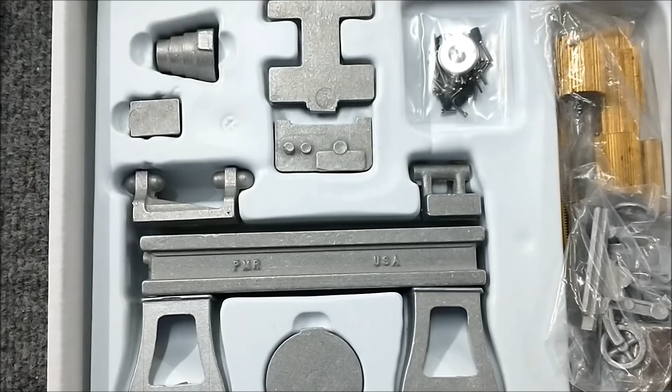PM Research Lathe Kit, Day 1. There's an awful lot of pieces here. As a matter of fact, there's 133 parts that need to be fabricated, and the blueprints are relatively clear.

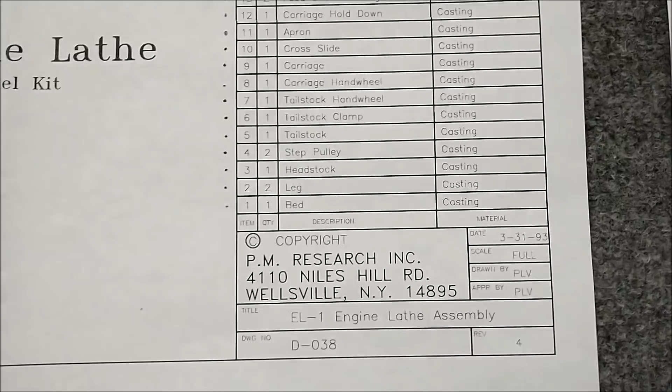The one thing that's not on these prints, and I was quite surprised to see that, is the item number. It tells you what the item numbers are here on the print and how many of each to make, what material it's made out of, or whether it's supplied as a casting. But when you get to the drawings, there's no item number on any of the parts, which I think is unfortunate. So the first thing you're going to have to do is tag them up. Find the part, put the number on the drawing so you know what to make it from.

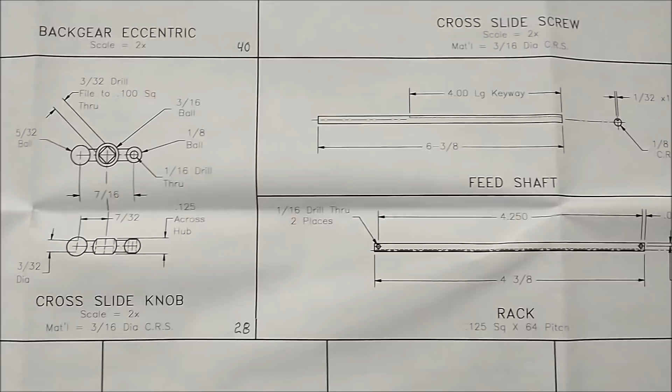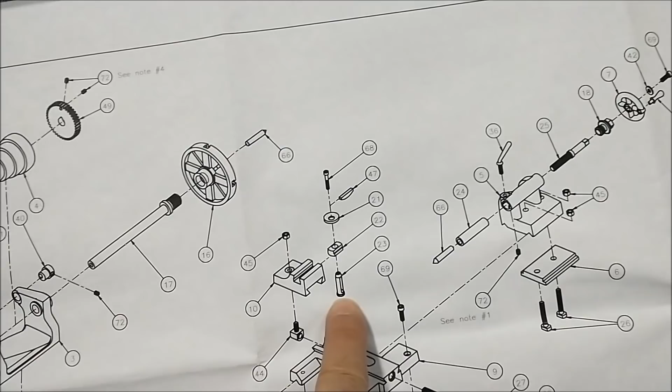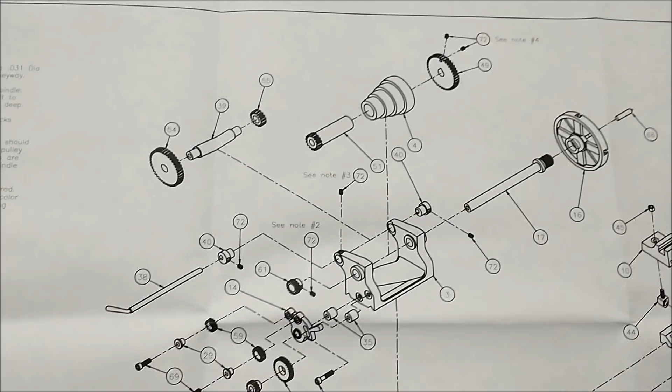There's a million different places that we could start on this model, but I think I'm going to start with something just to have a little bit of fun, and I'm going to make this little tool post assembly today. It is going to be extremely small. Well, since this lathe is so big, right? This has approximately a 3/4 of an inch swing, 19 millimeter swing. And if I am correct, then that would mean the faceplate is 1.5 inches in diameter. 1 3/8 in diameter, so it's actually under 19 millimeters. And that is to the ways, that's not to the cross slide or the carriage.

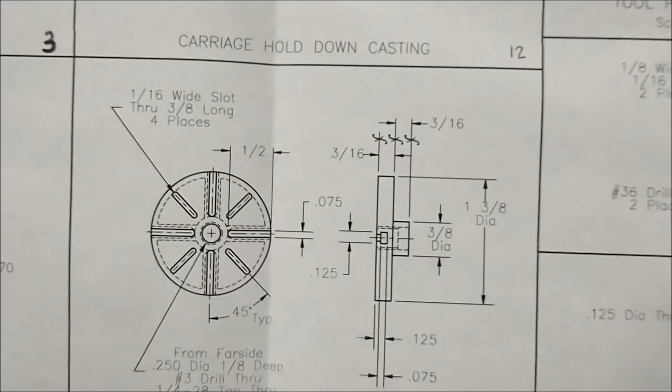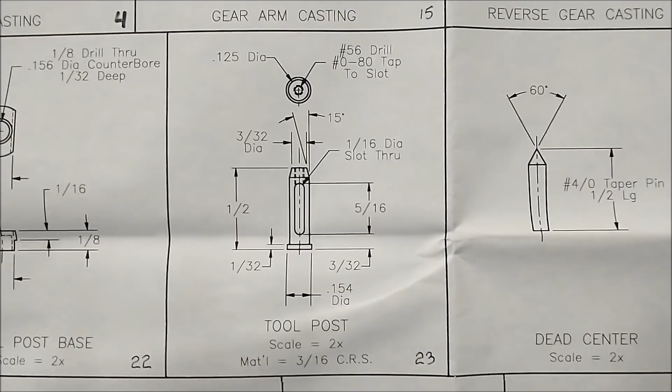These are the parts I'm going to be focused on today. Tool post, the base, the wedge, and the washer. Make a nice little assembly. You're going to see a lot of the techniques that I will use on this are very similar to, if not identical to, the techniques I demonstrated on the steam engine. So that means we're going to leave this connected to the bar, to the raw material, so you have a place to hold it for the slotting. This is going to be very delicate. You could squeeze it end to end, of course, to do that slot, but I think it's just going to be easier to leave it on the raw material that it's connected to initially.

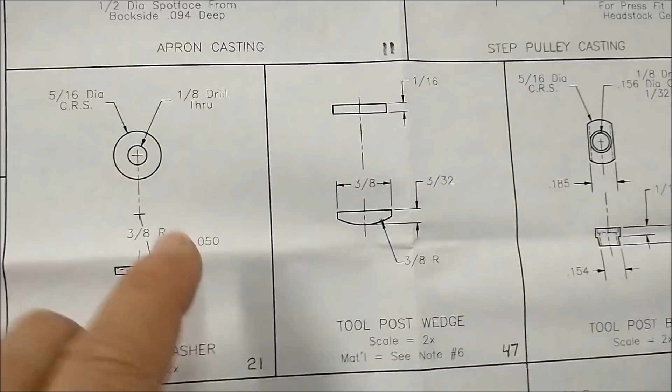This is done out of a washer. So you just take a little washer and you just section a piece off, which is pretty clever. And then make sure the radius in your tool post washer fits the outside radius of the wedge. You want a nice little rocking action when it goes in there. That's it. Let's take a closer look at the assembly print. And this is actually just an exploded view. They do not provide assembly sequence on this. There are some notes, assembly notes, that tell you what gets pressed into what, what's a slip fit.

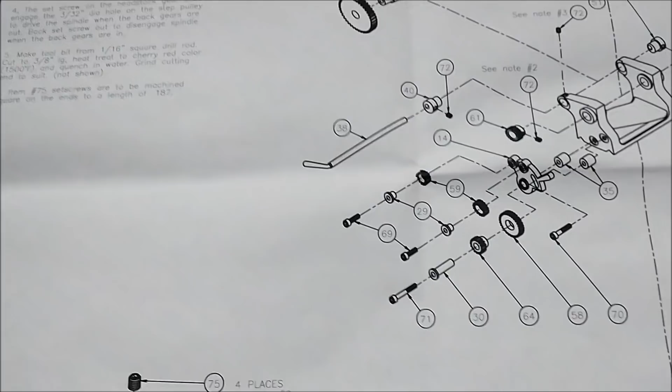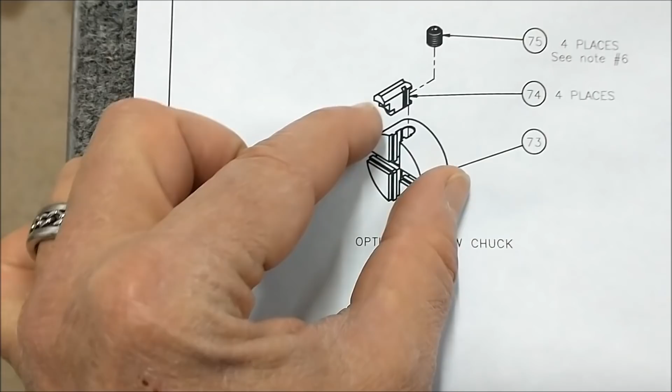And there's the infamous 4-jaw chuck. I'm looking forward to making that thing. That's so tiny. That's about actual size. That's how big it's going to be. Little thing. 25.4 millimeters across.

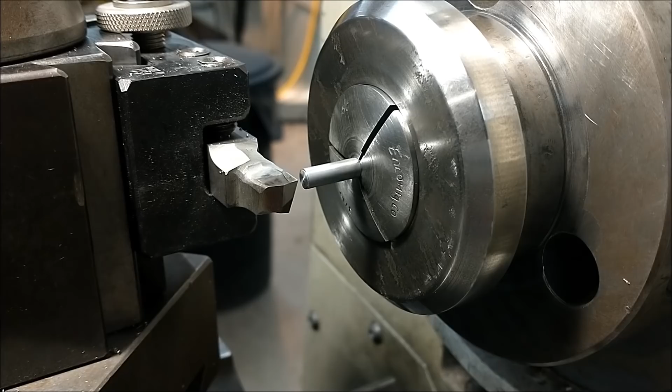All right, let's get over to the lathe, put some material in there, make some parts. First couple operations here are very straightforward. We're going to do the two diameters that are called out on the print, a 185 and a 154. Straightforward turning. Let's do it.

You have a couple of options for the 15-degree lead. You can do it with a form tool, or you can set your compound to 15 and cut it. If it's more convenient, use a boring bar and run the machine in reverse. I'm going to use a form tool. The only danger of a form tool is there's more surface contact and you risk the small diameter climbing up and over the tool.

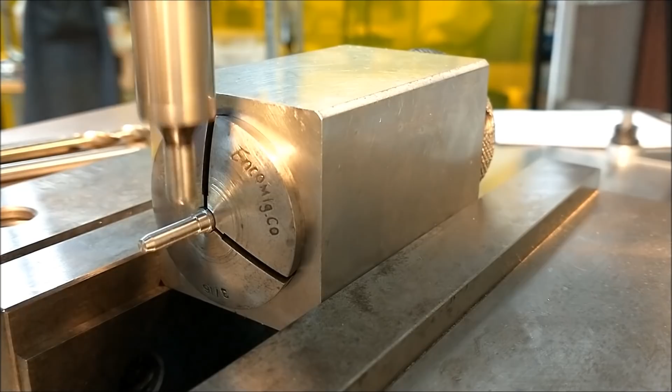I'm going to drill a series of 5 holes in this small part, and then I'm going to pick away at it with a 1/16 4-flute end mill. You can expect some flex to this part, so if you can support it, do. You don't have to, but not a bad recommendation. Spot face features are very small, so is the drill that's about to come. 0.055 in diameter, and we're going through with it.

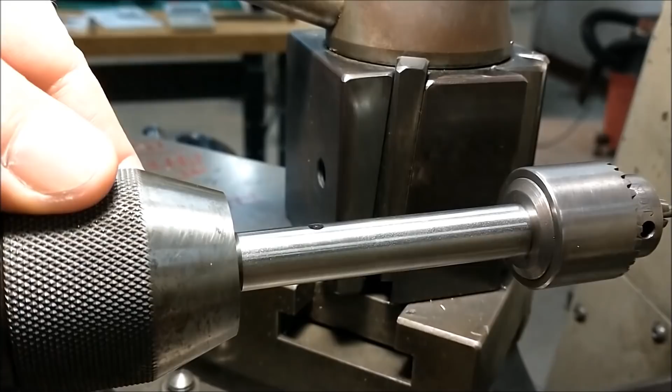All the drilling for the next operation is going to be done with my micro chuck adapter. If you haven't watched the video on how this is done, this is a standard Jacobs chuck, 3/8 capacity. This is a piece of 1/2-inch drill rod that's been turned down to 3/8 and reamed. Another cross hole, and then my micro chuck on the end simply floats in and out.

I will push this in by hand. I will not use the crank. I will get the tailstock close to start the operation, and all the drilling, all the center drilling you're going to see is going to be by finger pressure, just like that. Gives you a great feel. If you don't have one, make one.

This setup works very well when there's resistance on the drill, but be careful if you're breaking through to a slot or a cross hole. It will have a tendency to take off on you, so anticipate that.

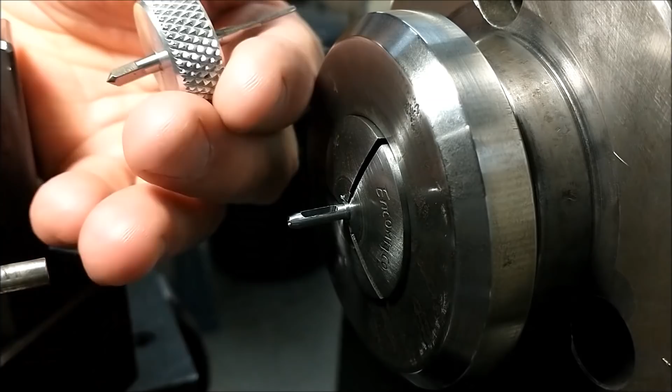Spring-loaded knurled tap guide. If you have one of these, make sure you put a light spring in it for the smaller taps and softer materials. You don't want to drive an 0-80 tap in with the same pressure you're going to use for a 1/2-13 in stainless. Not going to end well, guys. Make sure you know how much stroke you got on it. Preload it. Take your time.

Boy, I would normally be coming over the top with my hand, but I think you guys have seen enough pictures of the back of my hand for a while, huh?

These little wheels work really well. You can actually feel the tap flexing as you drive it in. Treat it like anything else. Back it off and clean it. There we go. Beauty.

This is not the kind of operation you want to do with a T-handle. It's just not suggested. Make sure you use one of these tap guides, or even a broken end mill or broken tap that has a small countersink in it. Use that as a guide. Clear the smudge off of it before we get it out. As you're backing it out, listen for it to click, or wait for it to click. You'll feel it.

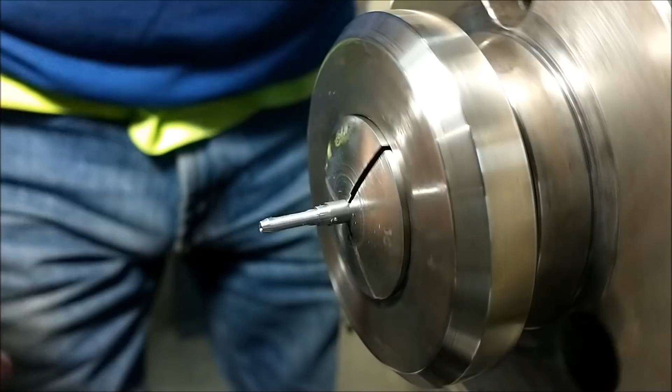Try not to overpower the part with a huge parting tool. Small part, small tool. Part is .500 long, 12.7 millimeters. I don't have the razor blade right with me, so I'm just going to use my little scale here. Part it off longer than I need to. I'm going to flip it around and face it.

Don't be fooled, just because it's small doesn't mean it can't get hot. Watch your fingers. Well, watch your fingers anyway. You might want to just put a cup or a rag or something under the part and not get your fingers that close to anything that's spinning. Especially if it has a slot in it, it's like a blender, so be careful.

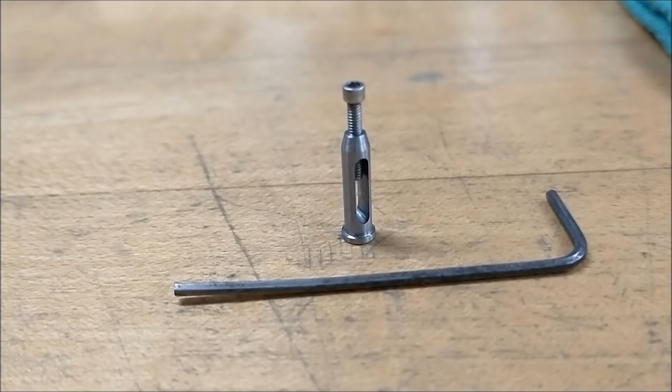Final product is 12.7 millimeters long. It's about 3 millimeters in diameter. For all of my Imperial friends, 1/2 inch long, .125 diameter, .154 head. It's a 1/32 shoulder on that, so it's about 0.85 millimeters thick on the end. 0-80 screw, that's .060 diameter. That is an .060 diameter screw, 1/16 of an inch, 1.5 millimeters also. And I think just by the size of my fingerprint, you can tell how small this thing really is.

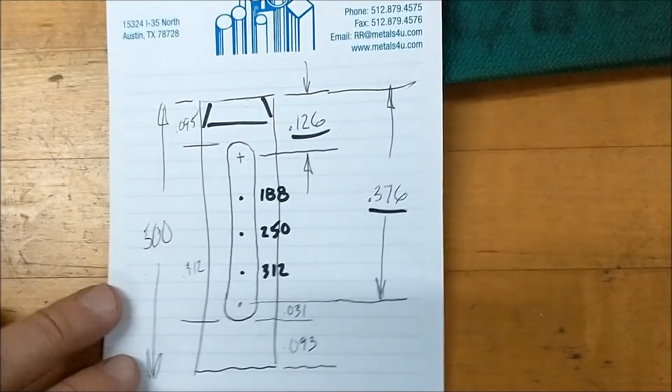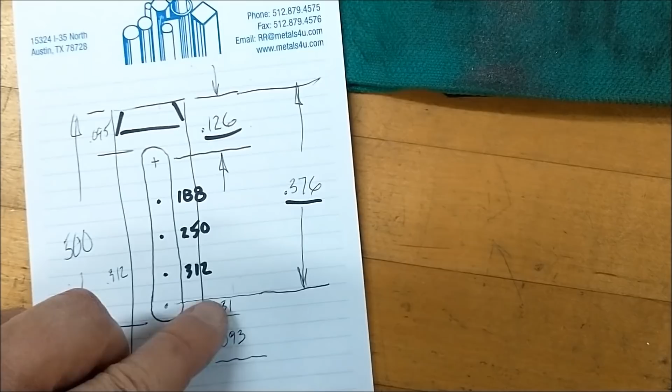Got to start somewhere. Start with the small stuff to give you confidence, because it can only get bigger from here. I promised I would show the numbers that I just used on the print. 5/16 on the print. That's the overall length of the slot. And that is the overall length. That is not center to center. That's the overall. So make sure that you subtract or add the radius of the cutter accordingly, like I did here. First hole was at .126, 1/8,

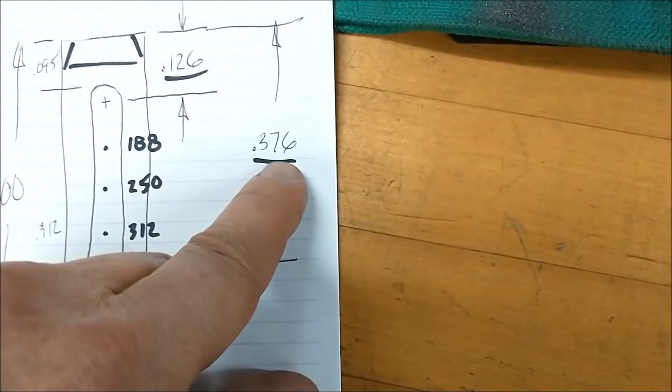3/16, quarter, 5/16, and 3/8. Easy. It ain't pretty, but it worked.

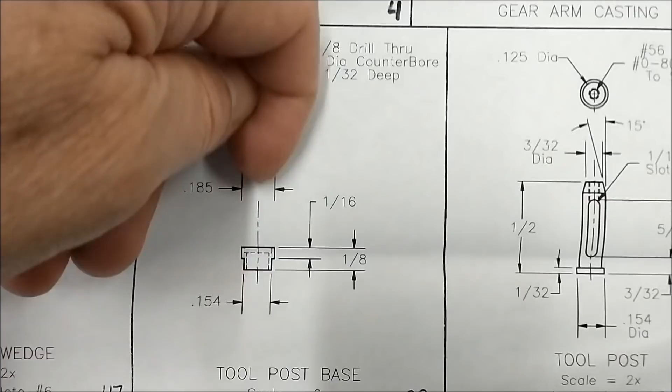The tool post base is going to start from 5/16 diameter cold roll, and I am going to do this backwards. So it's going to start from a round piece, just like it's shown, but I'm going to be able to drill and counterbore from one side, so it's going to be hanging out of the machine this way. I'll take it over to the mill. I will mill the face off, or actually just make contact with it. Do it in a spin indexer so I can rotate and get the .185 width.

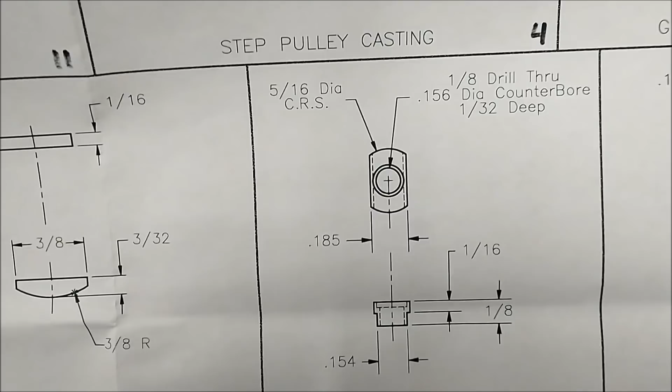And I will step the end mill up and over and do the back side and bring it back to the lathe and part it off. This is going to be a whole lot smaller than it looks when it's done, and I would like it to be done when it comes out of the machine. Let's do it.

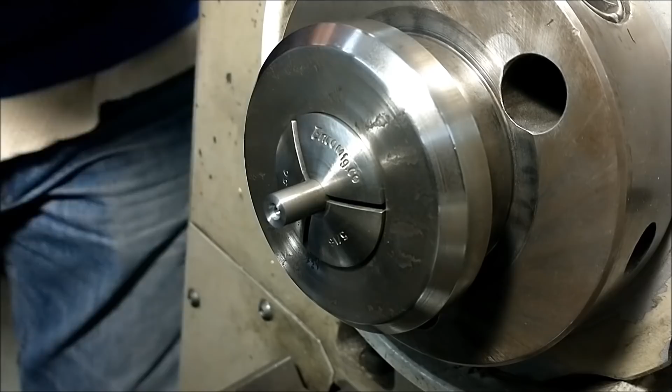Okay, whenever you counterbore a piece after you've completed the through bore, double check the through bore to make sure you didn't close it up from the pressure of the cut. This was minimal, but the potential still exists. Let's take it over to the mill, put the flats on, put the inner flats on, bring it back and part it off.

Okay, we're going to take a small dust cut, a witness pass across the front of this. Then we have everything we need. We don't need an edge finder or anything else. This is a spin indexer. I'm going to do all the cuts by rotating the part and not anything else. I could do it side to side, but stepping in like you'll see is probably the better choice. First thing I'm going to do is just bump this face with this cutter to establish a zero. Let's do it.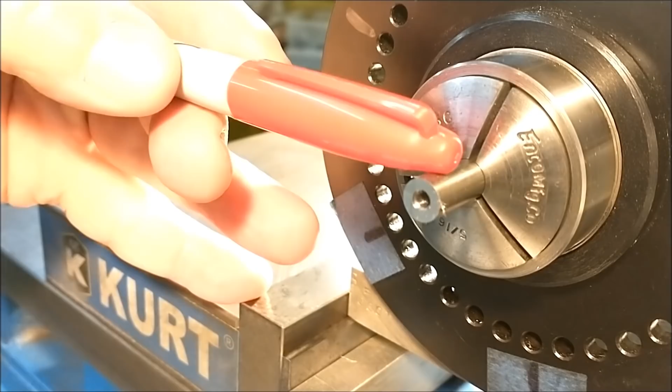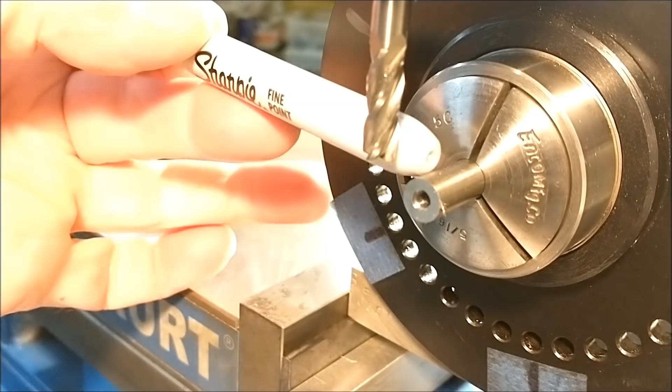The goal here is to end up with 1/32 shoulders on either side of this part. So by doing what I just did, let me get the cutter back into frame here. I know that the inside of the cutter is now true to the face of the part. So if I zero my digital or my dial, when I move in the diameter of the cutter, I know that from that point on, any shift that I make will give me the edge that I'm looking for.

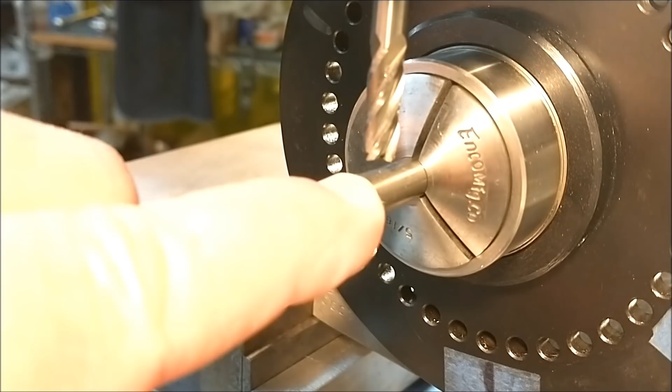To clearly illustrate that, I know this is a .248 cutter. I'm going to pull the part towards me, .248. I'm going to zero the digital at this point. Now if I want to put an undercut on here that leaves me with an .031 shoulder, an .031 shift, and when I plunge this cutter down into this part, the edge that it leaves right there is going to be .031 thick.

Let's do it and test that theory. Pull back on this just a hair. All right, here we go. I'm going to do the outside first though. Outside first, the .185 across the flats.

With the outer flats established, I can move the cutter on the y-axis however thick I want my little T-nut edge to be right there. And that is 32 thousandths. Shift it in, check it out. Excuse me, it is 62 thousandths, not 32, 62.

And you can see how the process works. Once you know the diameter of the cutter, it's easy to shift in the body diameter and then just a little bit more to give you whatever shoulder you're looking for, pretty much with no headache whatsoever. Going to deburr this part, put it back in the lathe, and part it off to the final length of 1/8 of an inch.

Finished length of the part is 1/8 of an inch. This is my famous razor blade parting tool trick. Dragging the front of the part with the razor blade. No obstructions, no hang-ups. When it starts to click, I know the parting tool is right there. There you go.

Until the click goes away. Zero out your digital, your indicator, whatever. Want to move it in 126, gives me something to clean up on emery if I have to. This will be an interrupted cut. Get ready to catch it with something.

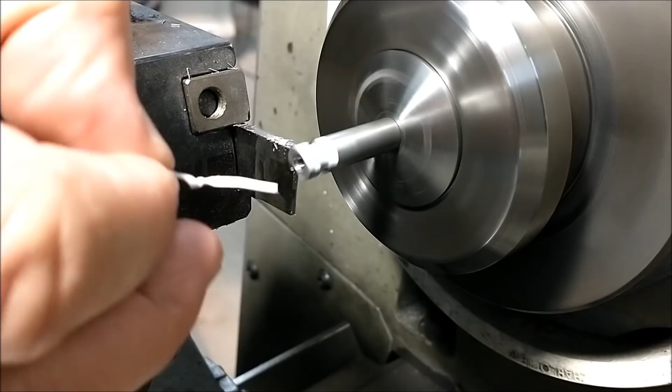See that. That is a very small piece. And we'll clean off any uglies left over by the corner round on the parting tool. Obviously there's a break edge on it, but that'll come right off. And that wraps up that part. Let's get a closer look on the bench.

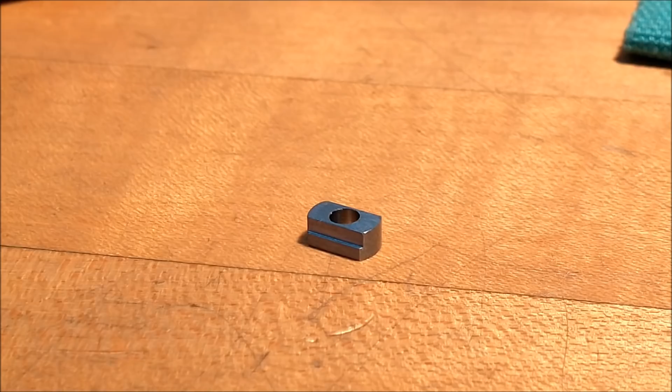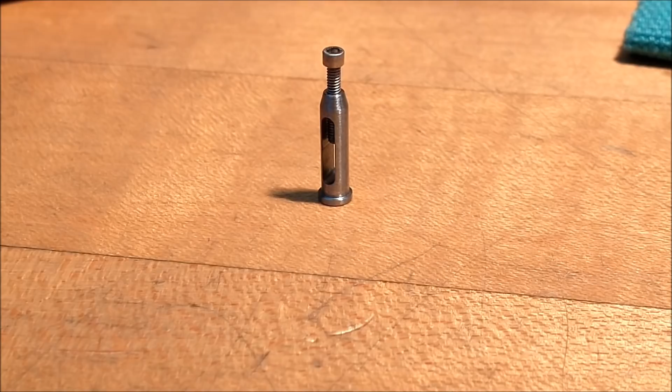And there is the results of today's effort. Just for fun, let's put that on the post. Done correctly, the post should be subsurface to the bottom. Nice symmetrical flat. It should spin freely, which it does. So now we got to make the concave swivel washer and a tool bit. Let's keep going.

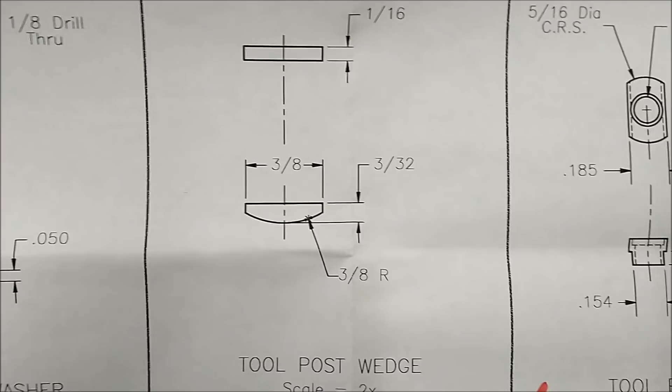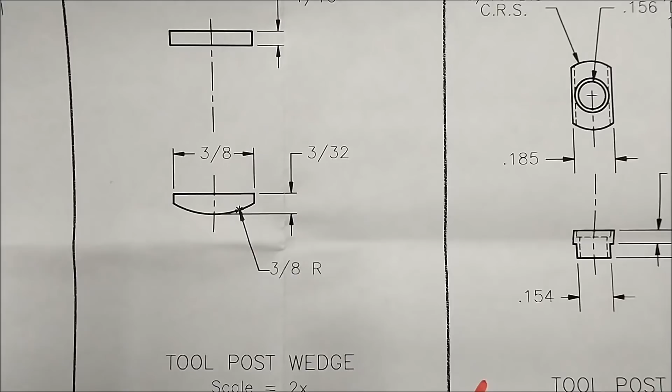The next piece I'm going to make will be this tool post wedge, and they tell you to make it out of a 1/4-inch washer. But the edges of a 1/4-inch washer are not all nice and crisp and sharp like that. So I've got a piece of 3/4 stainless laying around, and I'm going to show you a way to do this from a piece of 3/4 diameter stainless. If all goes well, it shouldn't be that hard.

All right, this is the setup. Nothing fancy here, guys. We are back in the lathe for this part. I'm going to face this off, and I'm going to part it part of the way through until I can work that back to the 1/16 of an inch thickness that I desire. I'm not going to part it completely off. It's not going to happen until it gets to the mill. Let's do it. All right, easy to start this one. Face it off, put an undercut in it, we're going to the mill.

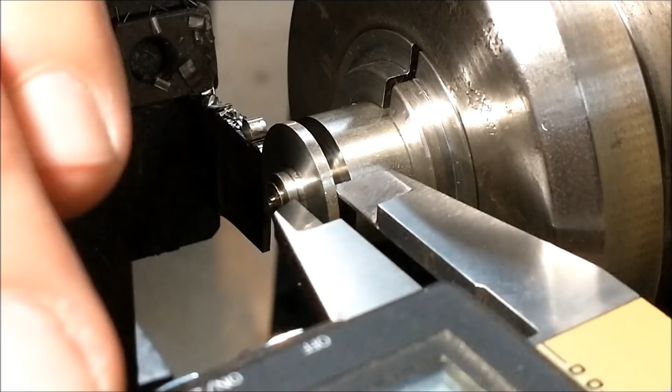All right, now I think you can see why they say it's easier to do this out of a washer. But I'm just not content with a washer. So part this part of the way through. Get it down to the 63, 64, whatever you're looking for. I want to see 63, so I'm going back in there. That's all you need to do to start right there. Okay, let's go to the mill, make it look like a wedge.

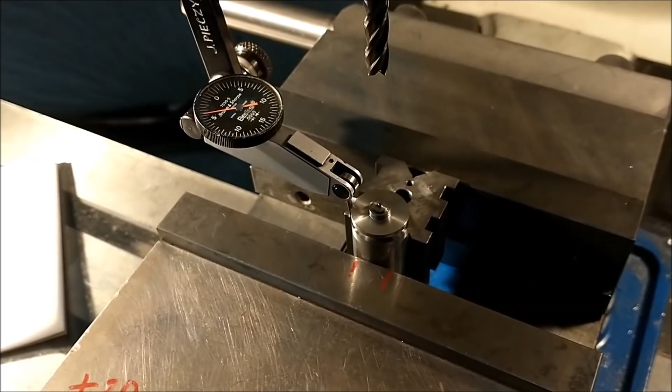Anytime you go from a lathe to a mill with a round piece, you start off with an indication of the part. There you go. We are just going to take a little piece of this, bite it off, and make a part that looks exactly like that. I can't give you the numbers on it because depending on what size cutter you use, your numbers will change. But I'm going to put a slot in it on either side of center, and then walk back and forth until the wedge just starts to fall off, and I know that I only have one really nasty edge to deburr. That'll be a really surefire way to make this wedge.

Let's put this camera on a tripod. What a beautiful picture that is. Put the camera on a tripod and we'll make it happen.

Note to self, guys, if you're going to grab a piece of scrap metal to do this, don't grab a piece of 304L stainless. This stuff is just nasty. 17-4 would have been a better choice, but 303 would be even better. All right, let's make a wedge.

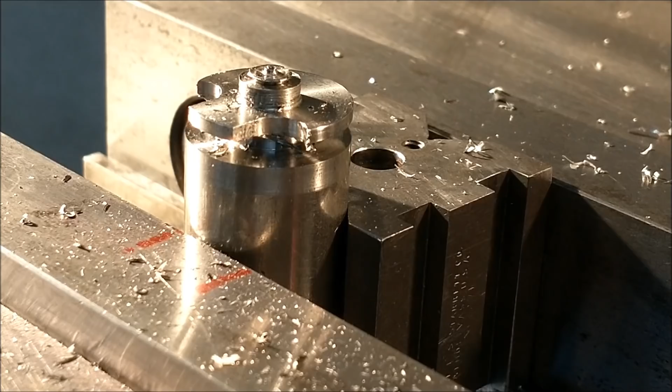Okay, up until this point, this is a fantastic way to do this if you're using a 1/8 cutter, which I'm not. Put this one on the calendar. Thank God this happened on the 12th of January. Get it out of the way. I added a 1/16 of an inch to my radius offset instead of an 1/8. Boo-hoo. That's going to have to move this part around the back and do that again. Not a problem. It happens. And it just did.

Okay, anybody that's paying attention knows that the camera angle changed and we have an unfinished feature on the back side. Well, that's because my calculator gave me the wrong number. I think the batteries must be dead or it's a defective calculator. So we're going to try again on the back side here. Actually, I'm going to fess up and say I calculated all my offsets for a 1/8 cutter when it's actually a 1/8 radius 250 cutter. So put that on your calendar. I'm safe for the rest of the year now. Let's try again.

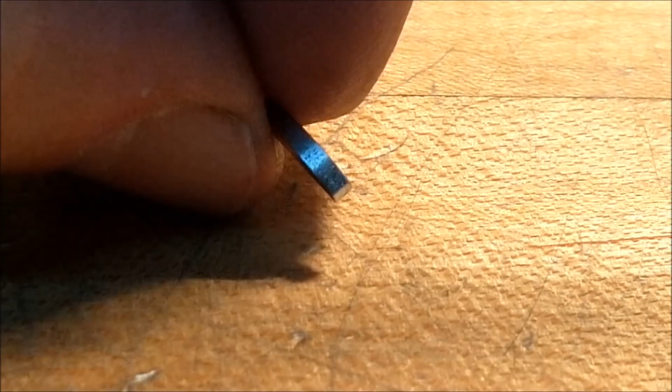That was fun. When you're done with your tool post wedge, it should look like this. The very next piece in line will be the cup that it sits in that gives you the height adjustment in the tool post. And how small is that? That's how small it is. That is tiny. I'm looking forward to seeing this thing go together. You can do it from the washer like they suggest, but I wanted nice square edges on mine, so I did mine the way I did it. 304 stainless. Another piece done. Let's move on to the cup.

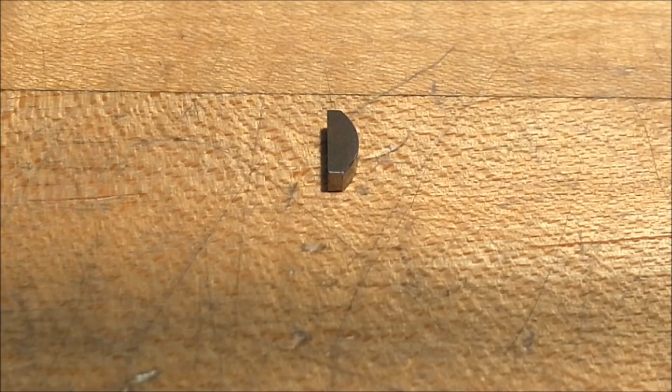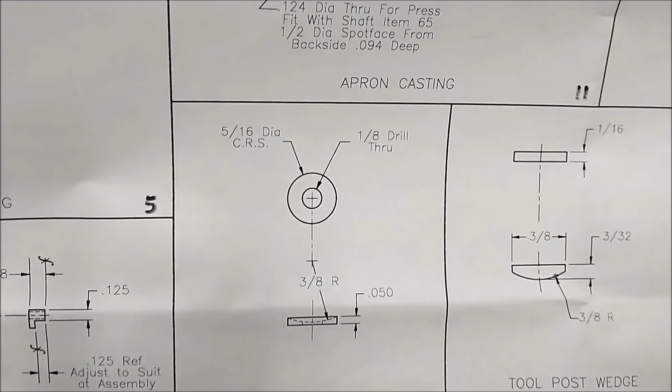Last piece in the setup right here is the tool post washer. The only thing difficult or even challenging about this is this radius right here, and you could probably put an angle in here if you had to, so long as this wedge sits in there nicely and articulates back and forth on the edges, not on the center. On the center it's going to be a little bit less stable. 5/16 cold roll, 1/8 inch through.

See if we can grind up a tool real quick and do something about that radius, get this done. We're going to use the remainder of the material from the T-nut. Flatten off the face, continue with the 1/8 inch hole, and put a dish in the front with the form tool. Radius form tools are not that hard to do. The hardest part about a radius form tool is getting it on center, vertically and axially.

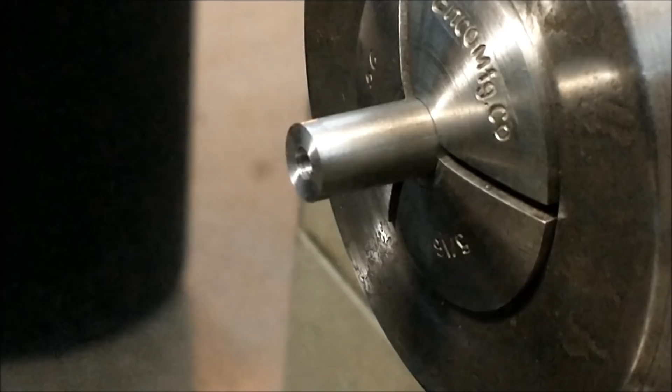See if we can get lucky here. I do have a radius gauge, and this is a form tool I've had for quite a while. I'm just going to try to line up the peak of this radius with the face of these jaws. Doesn't give a specific depth, but it does show an edge around the radius, so let's not go too deep with this.

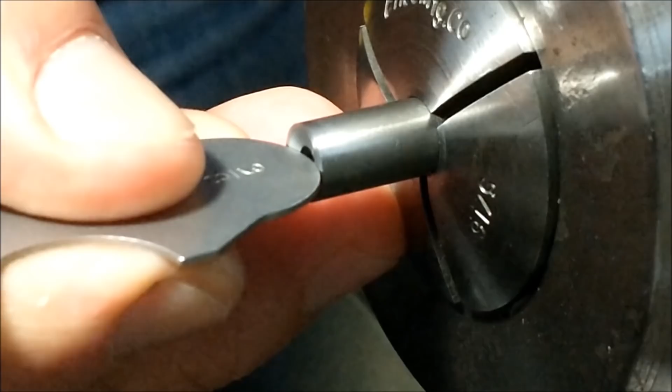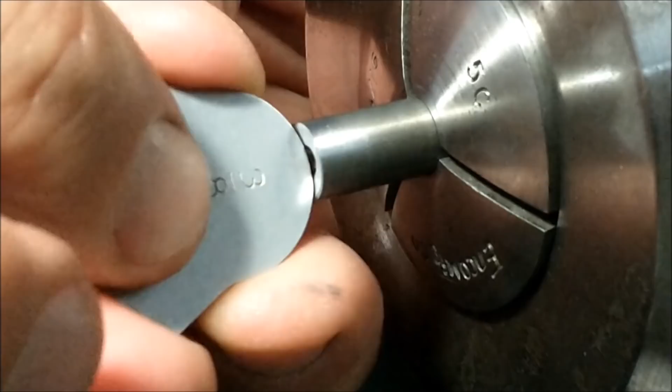Well, I hope the camera got that. That is really superficial. Radius gauge itself should sit right in there. And that is really hard to tell exactly where that's registering. I'm going to block you out here for a second, forgive me. Like it.

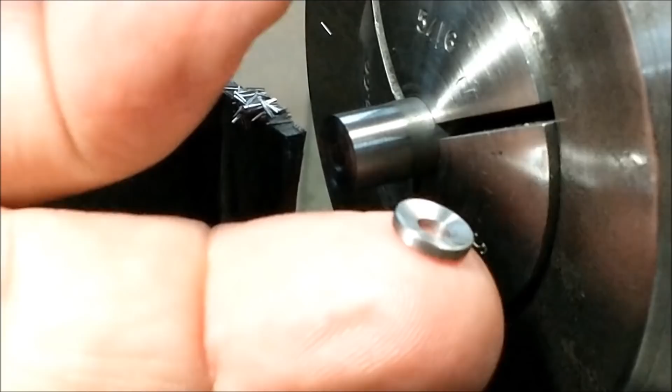Do yourself a favor and keep your lathe clean while you're doing this. You drop one of these, you'll never find it. Little dish in the face, 1/8 inch through. Break edge on both sides. I'm going to run it on some emery. Let's put this thing together.

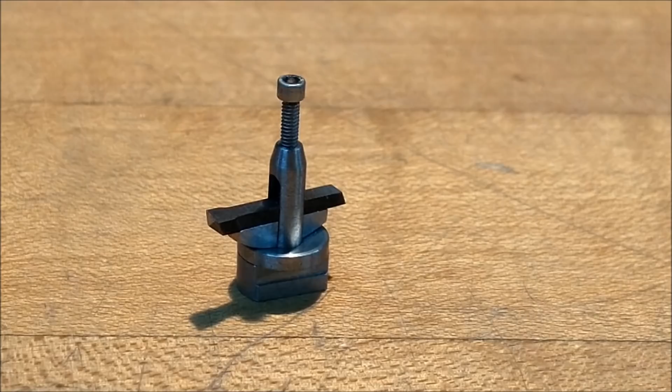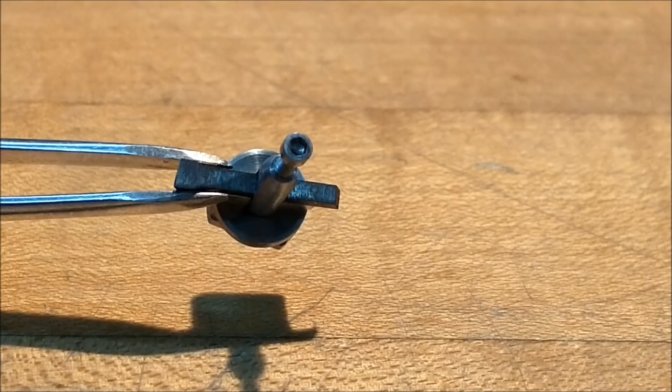Anybody that may be curious as to whether or not that's an actual real tool bit in there, it is. What I did, I took a section of a parting tool and I cut it off with a Dremel. So the T profile that you see is actually the profile of the parting tool, but now it's laying down. And yes, that is a high-speed steel tool bit in there. That is about .040 by .060 with a little bit of nose on the front. So I'm going to bet that that will cut when the time comes.

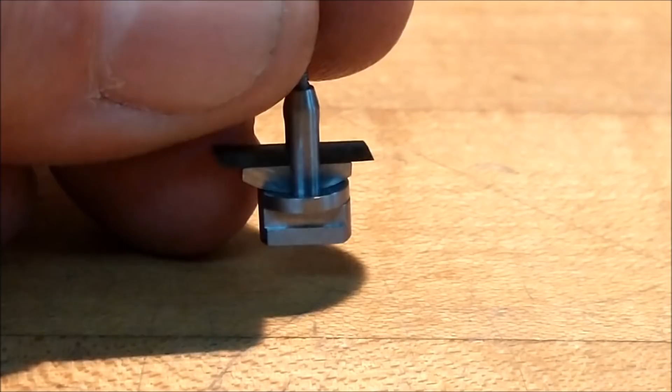Everything is made out of steel with the exception of the wedge. The wedge is 304 stainless. And I guess that's about as real as it gets.